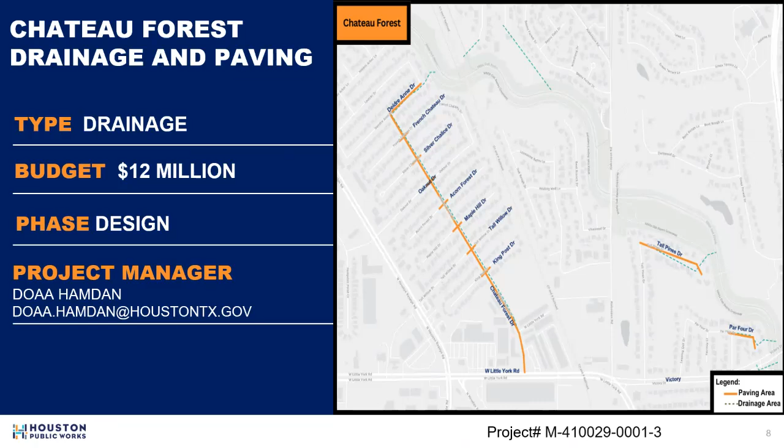Stay tuned. Houston Public Works will host a how-to-prepare-for-construction meeting so you're fully informed and ready. Leading the charge is our dedicated project manager, Doaa Hamdan, and we're excited to partner with you on this journey towards a stronger, more resilient community.

Thank you, Kenya. Thank you for the introduction, both Kenya and Tanu. Good evening, everybody. Rahul Menon here, project manager at Asani Consultants. We're the lead design consultant on this City of Houston project. Over the next couple of minutes, I'll go through some of the slides and provide you more details on the project: why we're doing this project, what issues we have looked at, and how we actually resolve some of these issues.

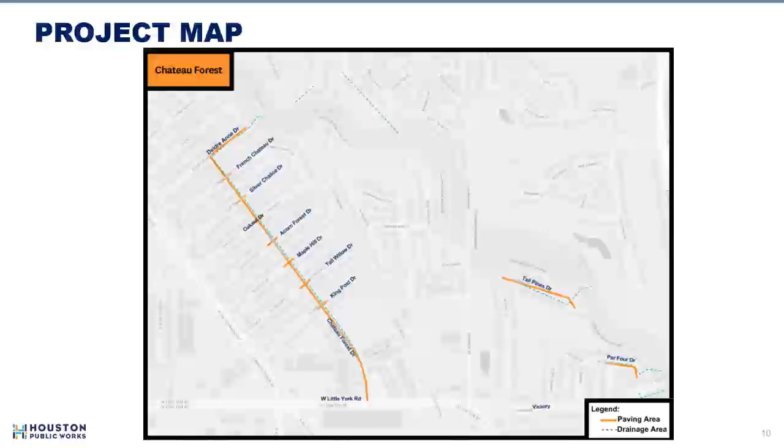Next slide. So we've noticed, as Kenya walked you through some of the project limits, when we look at the streets, we've actually found a lot of issues, both on the drainage and on the paving side. On Chateau Forest Drive, for example, you see some pictures that we clicked in the field. We've seen some cracks in the pavement, the overall paving condition is pretty poor on many of those streets, and you do not have sidewalks on most of the streets in the project area.

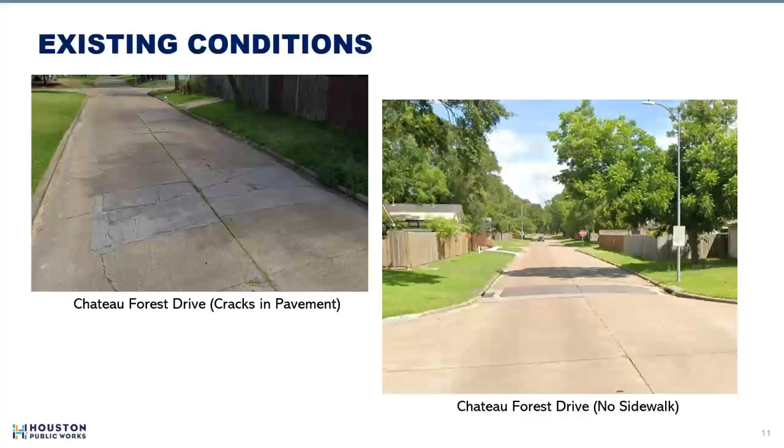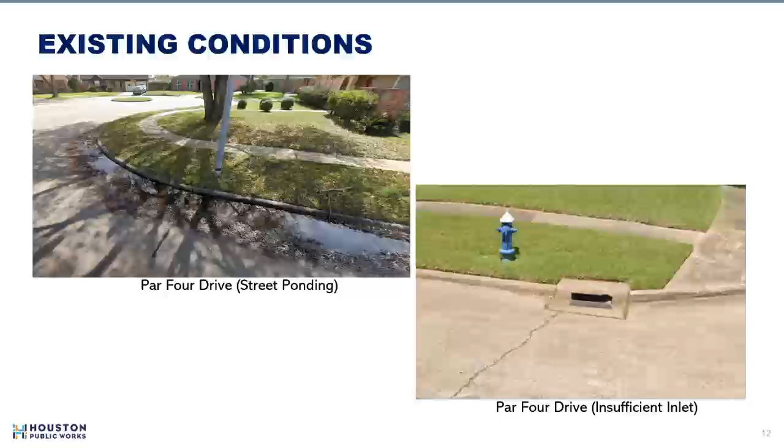Next, please. Drainage is one of the main concerns we have in this area. Most of the streets are poorly graded, so you have waterlogged low spots, as you can see on the image on the top left. We also have insufficient inlets throughout the project area—some of these inlets do not intercept or convey enough flow, which results in street ponding on many of these streets. We've also identified some water lines along some of the streets which are old and nearing the end of their design life, and those have led to many maintenance issues we have faced in the recent past.

If you can just go back to the previous exhibit here—the exhibit that you see here points to where the project area is, and the streets marked in gray are where we're going to be rehabilitating the pavement. These improvements are largely restricted to Deirdre Ann, Chateau Forest Drive, Tall Pines to your right, and Par 4. Since we're doing a full street reconstruction, you'll see sidewalks being added as well to some of those streets.

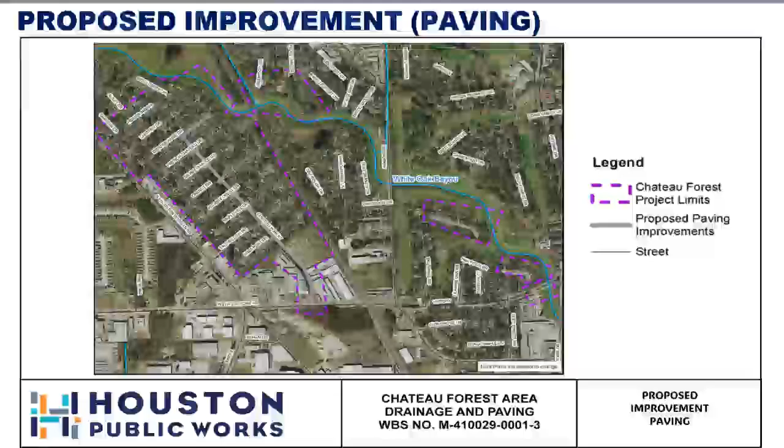Sidewalks, 5 feet sidewalks have been proposed on both sides of the street. We're also proposing ADA compliant wheelchair ramps at intersections for the safety of pedestrians.

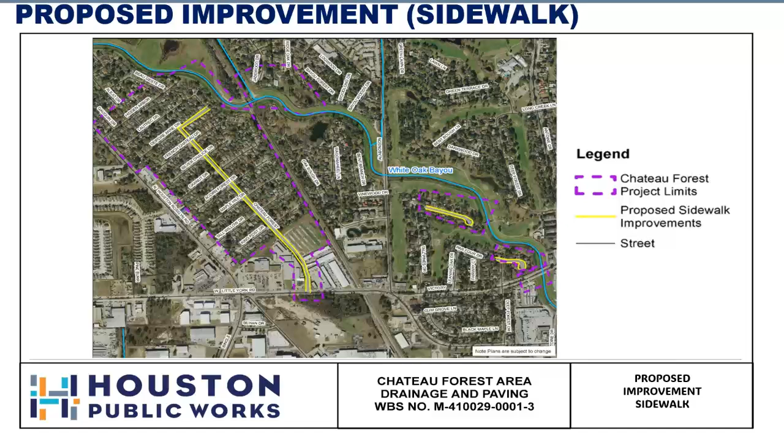The water lines along Deirdre Anne and Chateau Forest Drive were found to be more than 50 years old. They're almost at the end of their service life, and we have proposed new water lines to replace these. The existing water lines are cast iron, and we are replacing them with PVC, which has a longer life and slightly cheaper maintenance cost.

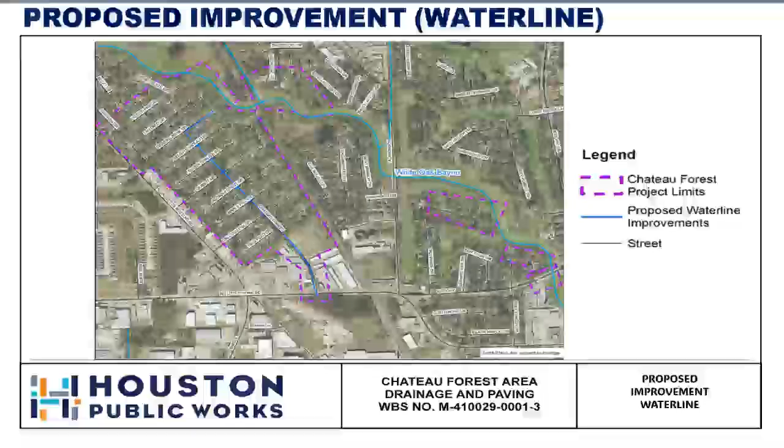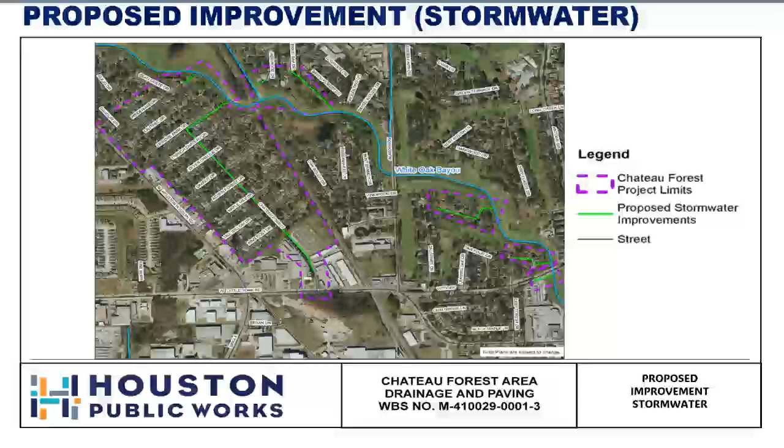In addition to that, Par 4 and Tall Pines to your right are also streets where we're proposing storm sewers. In all, in addition to the storm sewers, we're proposing outfall improvements at 7 different locations along White Oak Bayou. In combination, all this helps us convey more flow to White Oak Bayou, which reduces some of the flooding concerns in this area.

We have curb inlets that connect to these storm sewers, helping convey the runoff to the ultimate outfall. On the paving side, we are reconstructing some of these streets with new pavement. We're putting in sidewalks and also replacing the water lines on some of the streets. The paving improvements would also include wheelchair ramps.

We're also replacing some of the street lighting. We do have existing street lighting here, but they do not conform to the latest City of Houston guidelines, so we are replacing these to conform to the latest standards.

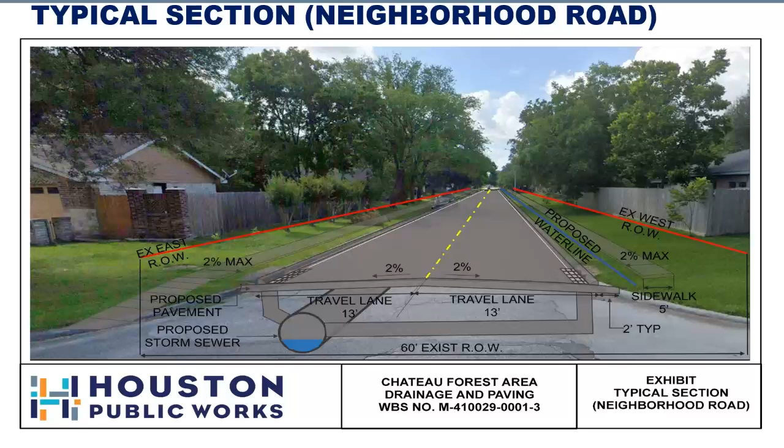We have proposed storm sewers in addition to the existing ones along these 2 streets, so 2 trunks that help convey more flow to White Oak Bayou.

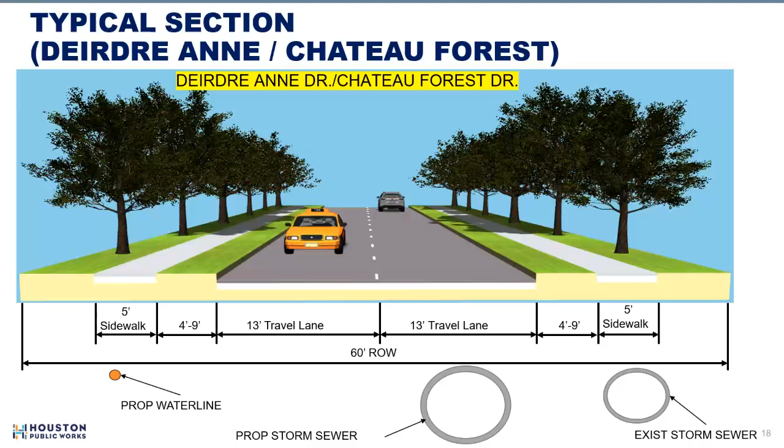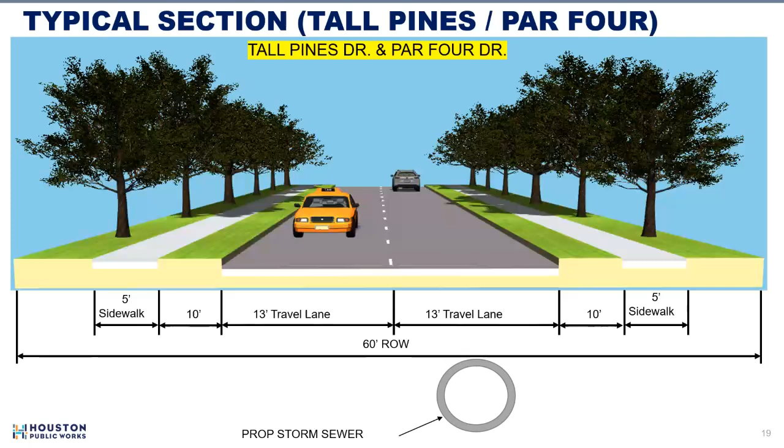As part of the design, we have consulted arborists to preserve as many trees as we can, even with these improvements. We have prepared a tree planting plan that would offset any impacts to existing trees, and the replacement would be with the same caliper, meaning it may not be the same trunk size, but overall we will try to match the same trunk size that we are replacing the tree with.

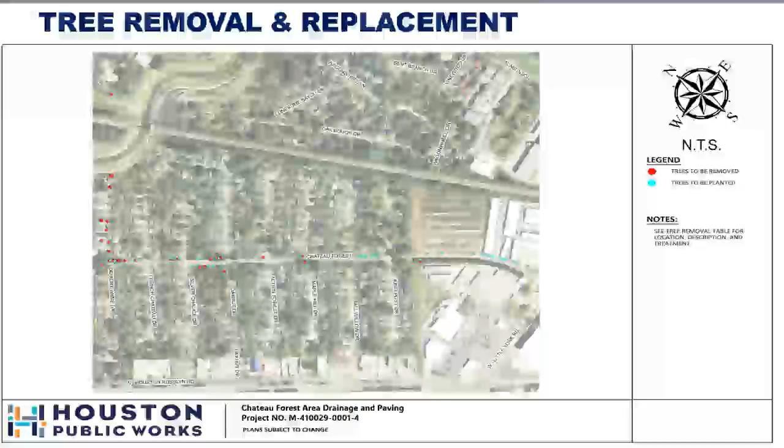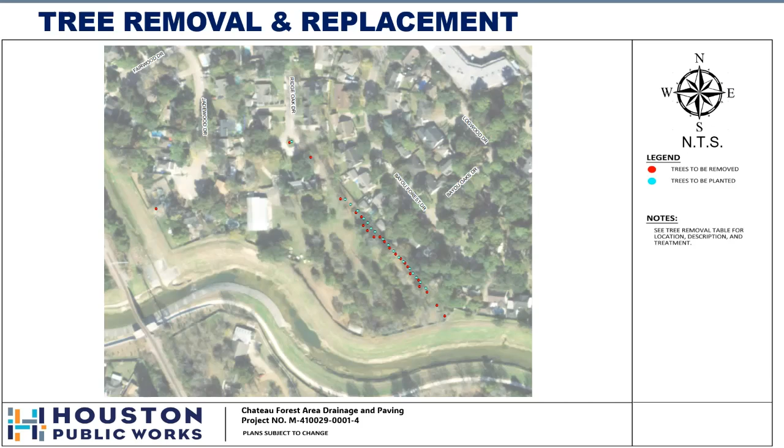So if you look at tall pines, you'll see more trees to be removed. The storm sewers proposed on tall pines, the outfall pipes, pass through a flood control owned property, but the city has a drainage easement here. So to install our storm sewers, we will be removing many of those trees, but they are not in the public right of way. They're actually in a flood control owned property.

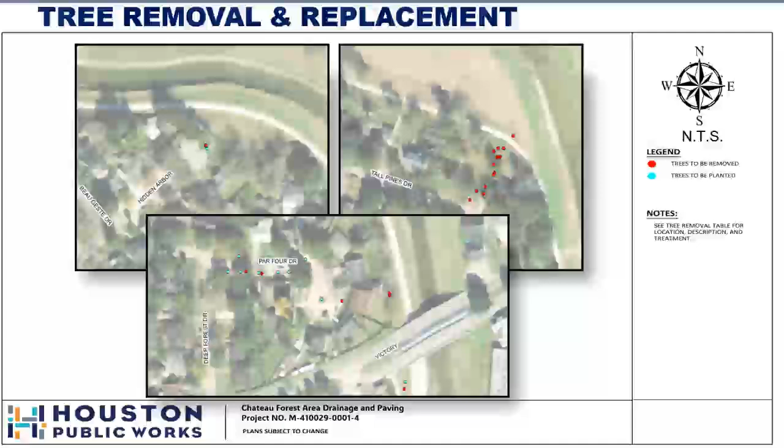Next slide. To sum up the project, we are replacing close to 7,500 linear feet of storm sewers. We are adding 7,200 linear feet of new sidewalks in the project area. We've identified about 77 trees that would potentially be impacted, but we are also replanting them to make sure we are offsetting any kind of impacts to such trees.

We do not have any sanitary sewer improvements as part of this project, but there are some adjustments that need to be made to existing sanitary sewers within the project area. So we have, all in all, about 450 linear feet of sanitary sewers that need adjustments. We have 4,660 linear feet of water lines that will be replaced as part of this project, and almost a mile of new pavement that will be installed within the project area as well.

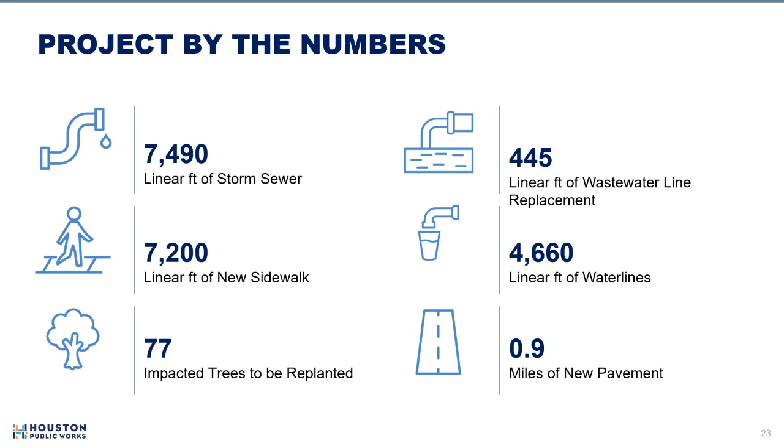As part of the street improvements, we are adding in sidewalks and wheelchair ramps. We have about 34 ADA compliant wheelchair ramps that we'll be installing. We are adding about 40 new street lights within the project area and 35 new curb inlets that would help in conveying more runoff from the street down to White Oak Bayou.

I'll hand it back to Kenya to see if she has anything to add, and I'm waiting to answer any questions that might come up.

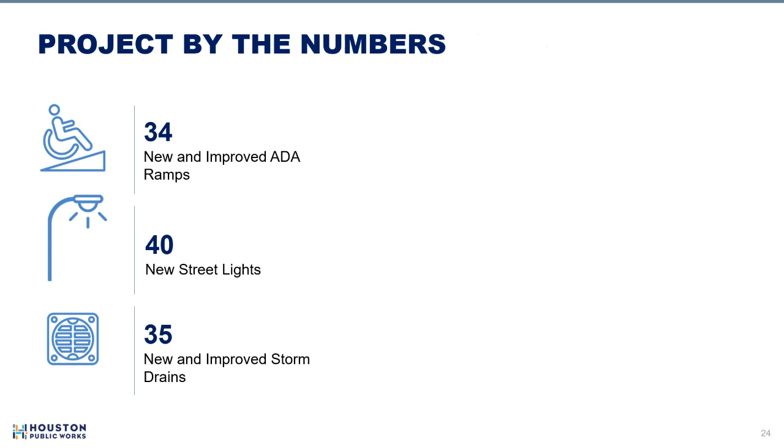Thank you for those insightful updates. Your project is moving forward. We're in the home stretch. The design phase is nearly complete and construction is set to begin this fall. Houston Public Works will host a community meeting to help you get ready, stay informed, and know what to expect during construction, so stay tuned. Together, we are building a better Houston.